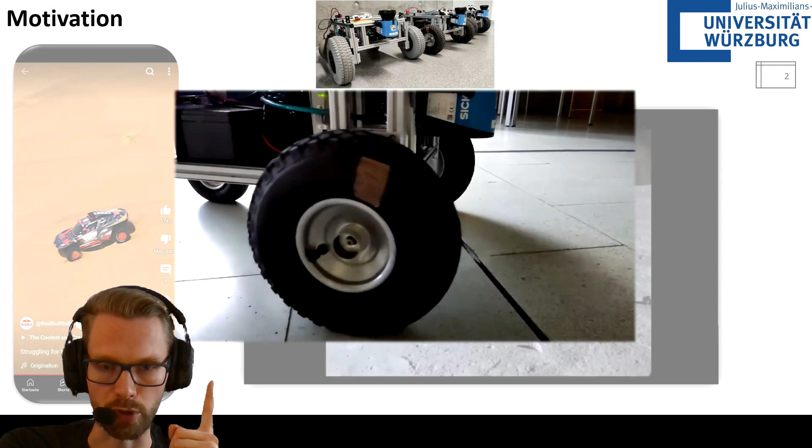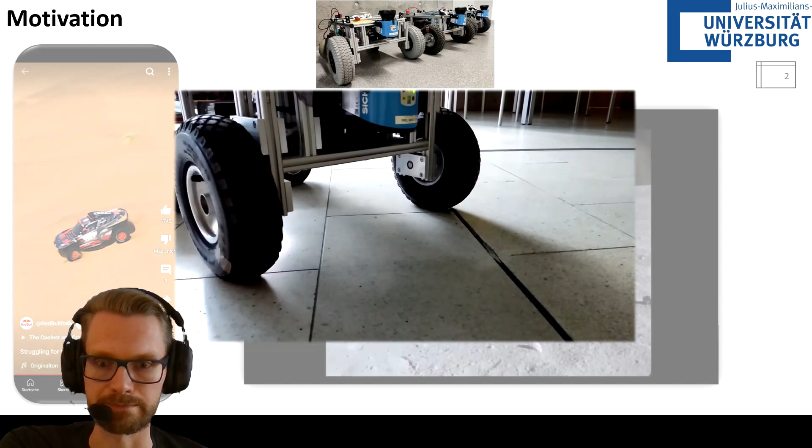Let's have another example. Maybe you do know these kind of robots. These are so-called Volksbots, and we have some of these at the chair for robotics, and they're equipped with laser scanners and fancy stuff. They are not only, but also for teaching purposes. And I did record a brief video on my own. So you can see it's an aggressive movement, on purpose to be honest, just to make it really clear. Here in slow motion, you can see once more that there is not 100% traction.

So these were examples of how it should not look, but how should it look then? I also prepared something like that. Now it's actually a real planetary rover, and you will see it is trying to get up this small but very slippy obstacle. Again, let's have a look.

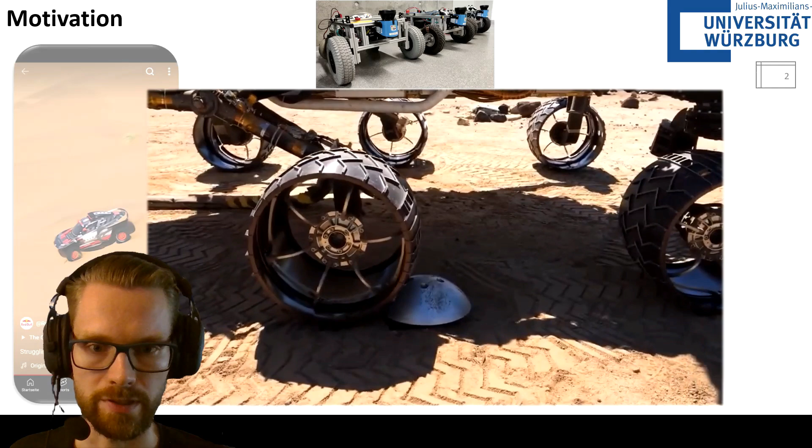This was very quick, regarding the traction control doing its thing. So let's have another look and try to focus on the point when it actually hits the obstacle for the first time. I will comment on it. So watch, slip, and traction. As said, quite quick. So I think this is enough for motivation.

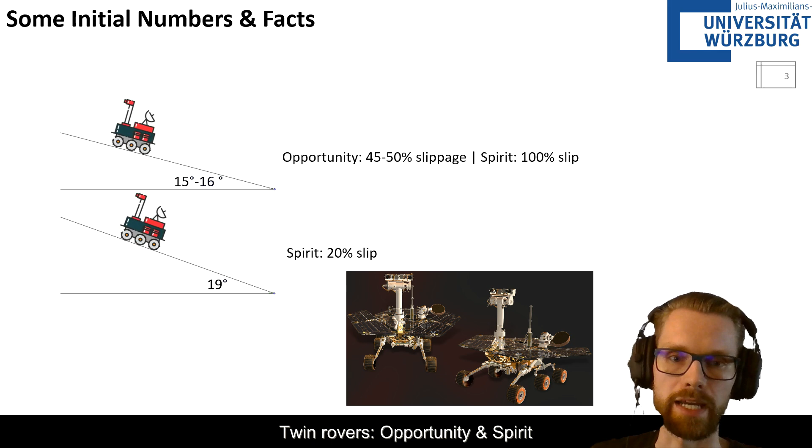Now I also want to give you some initial numbers and facts, not too many, but at least a few. If you think of the rover Opportunity, it experienced a slip of around 50% when it tried to get up a 15-degree slope. And 50% slippage is already quite bad. But on the other hand, Spirit experienced 100% slip, so there was no actual translational movement anymore at all.

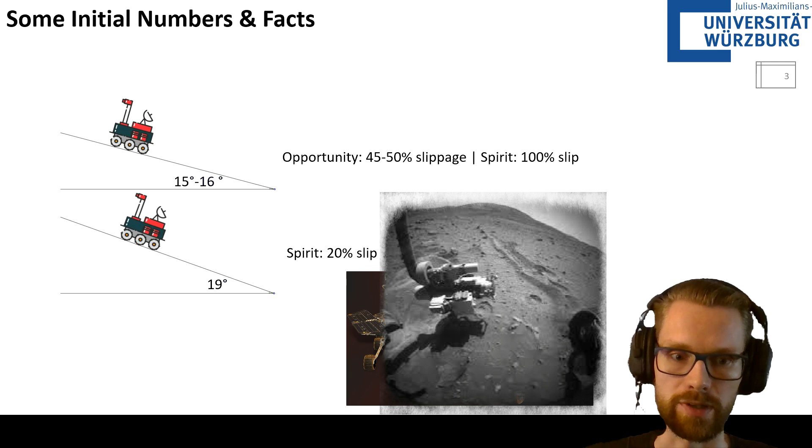And this is the reason why the mission for Spirit was over, because then you can of course not do anything related to your actual mission anymore. No scientific work, actually nothing. So this is the main reason why traction control is so important, because if it fails, you can lose your whole mission, and this is a worst case scenario. But on the other hand, Spirit, before this happened, experienced just 20% slip when it tried to get up a 19-degree slope, so you cannot simply say the steeper, the more slip you have.

And also, just keep in mind, for the sake of completeness, that Spirit and Opportunity were identical. They were, so to say, twin rovers, and so it does not only depend on your rover, on your tires. They did not have tires in that sense, but it does not only depend on the wheels, but also, of course, on the soil and the specific environment and the specific situation your rover is in.

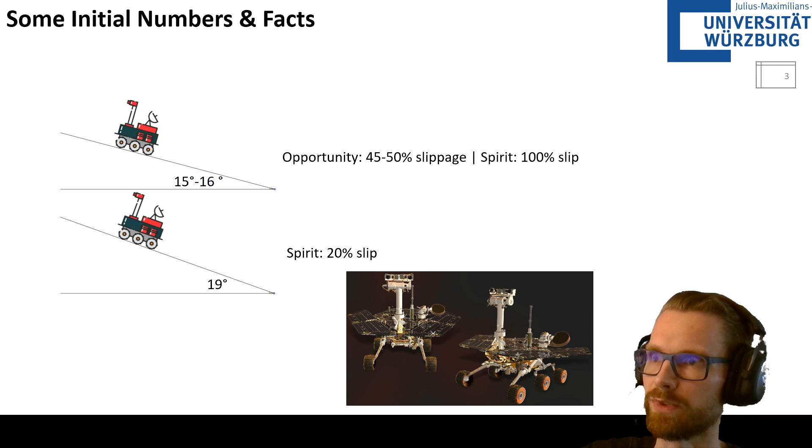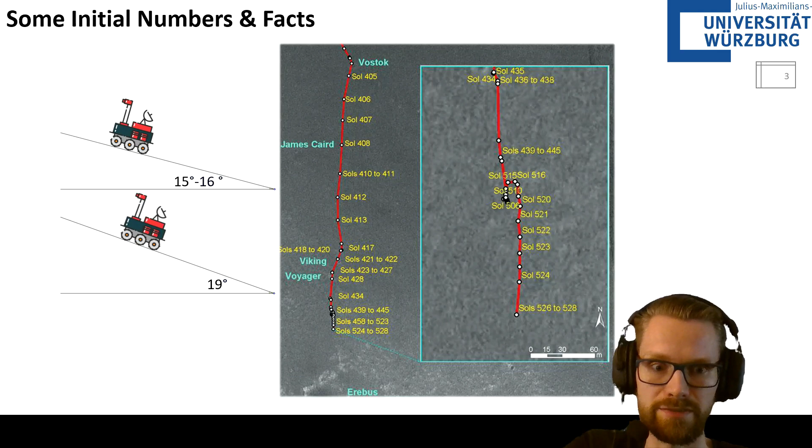And I just wanted to show you yet another picture. Here you can see the trajectory. This part here is just zoomed in from this part, and I wanted to make you aware of this point here, this movement, because this looks so similar to the initial video we just saw with the car in the dunes. And here actually something similar happened: it was driving back for a moment and then had another attempt to get uphill. Yes, and also Opportunity had an issue when it was stuck for 5 weeks, and it took the engineers 5 weeks to get it out of its, let's call it, trap.

I am talking about the overall velocity, which we do not know. Why do we not know it? Because if we have slip, we cannot just take the angular velocity, we have to do something else. And this is the part where it gets tricky. Well, so what can we do about this? I promised you to talk about countermeasures.

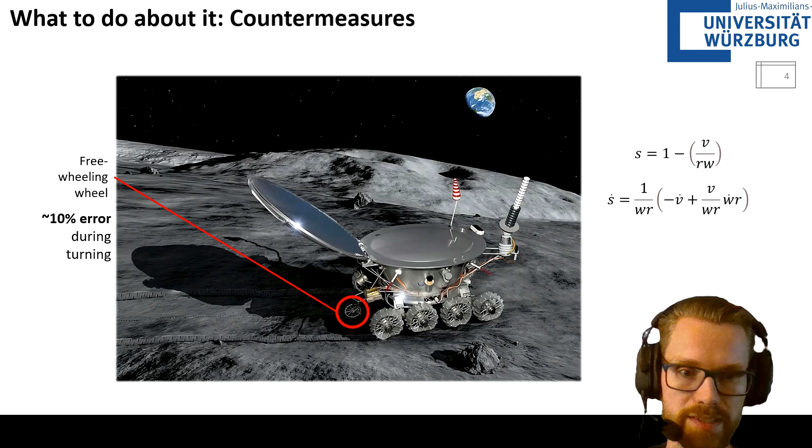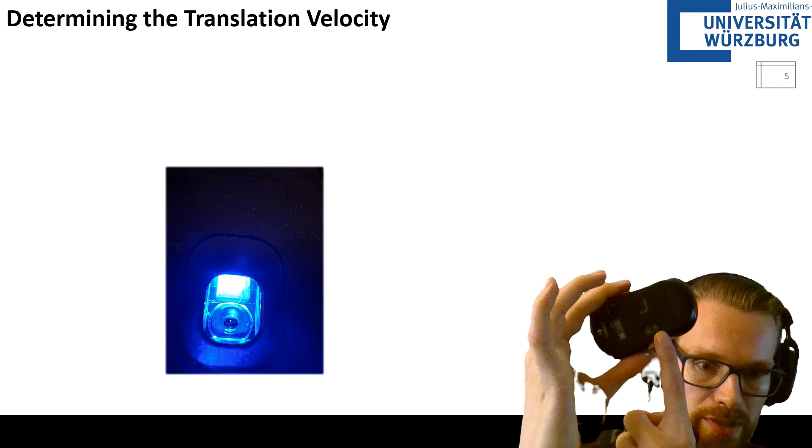So what else can you do about it? Maybe you don't know what you can see in the picture right here. If not, I'll give you a hint, if you can see it on my green screen. It's just from a computer mouse, an optical computer mouse, to be precise. And if you put something similar on your robot, you can track the ground and again do your calculations, and then you have your position, and from that, over time, you can calculate your true velocity.

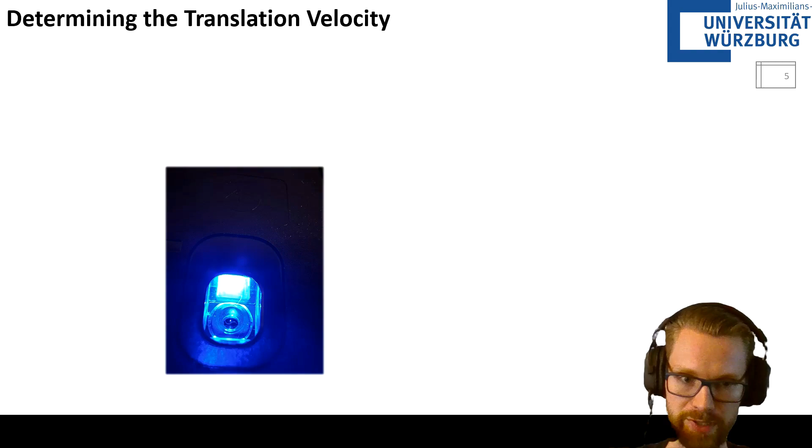This was actually implemented or built into a few robots, but you can easily see these are no practical planetary rovers, more or less prototypes. Actually, it's also for teaching purposes, not as cool as the one from my supervisor I just showed you before, but at least this one here on the right hand side is for teaching purposes.

This one is a bit more enhanced, it's better, more or less, because it has 2 mice, and then you can also reduce the error and so forth. But let's not focus on this. There are also other techniques, like visual odometry. You can use a camera for that, or here in this picture you can see a stereo camera, also again to be precise.

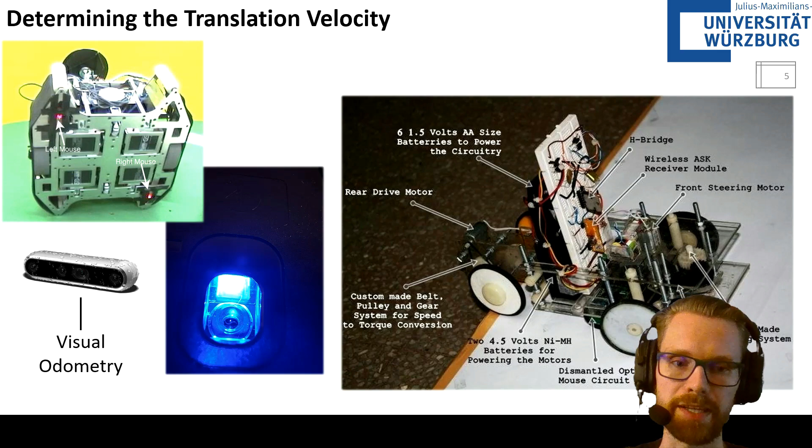But visual odometry for getting your true position is yet another subchapter of the book, which is my main source and which I showed you at the beginning. There are already videos from my fellow students on this channel here on YouTube, so check these out if you want to know more about this, and let's not dig deeper into this. Also, for the sake of completeness, you could use an IMU, an inertial measurement unit,

to improve your data. To be honest, in this book I was just talking about, they said they do not have good results with that because of the drift. But on the other hand, the guys here, Yoshida, doesn't matter how they're pronounced, said they do actually have quite good results with an IMU. So there are different opinions out there, let's put it like that.

But just to mention, for example, Curiosity is also using an IMU, and it has not just one gyro or accelerometer, but 3 each, again for improving your data by having it in a redundant way. But for now, let us just assume that we have the true velocity, so to say. And what is then left to say?

The suspension also plays a role, of course, on the behavior of your system, in particular of your traction. I think you maybe know this suspension type, which is quite famous. And for that one, I found an algorithm which I love for its simplicity, and I will go through it step by step with you. Let's just begin.

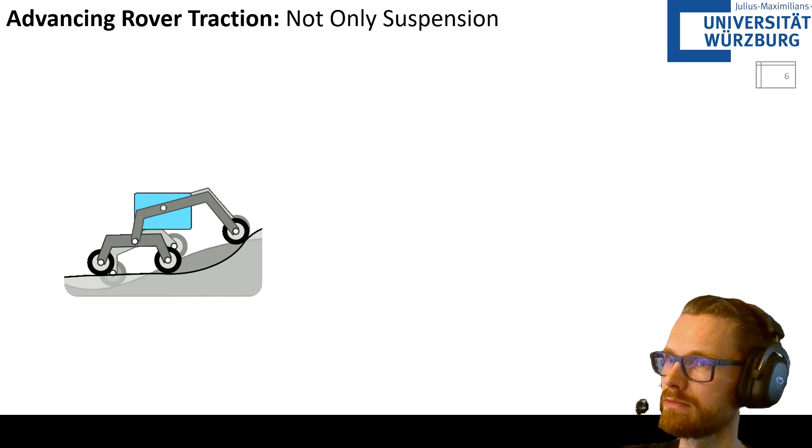So you have your initial speed, you're going straight with this robot, and you keep the velocity. Then, as an obstacle approaches the front wheels, you increase the speed of the middle wheel by 30% and decrease the speed of the rear wheel by also 30%. Then, when the obstacle is directly under the front wheel, return to your initial speed you had before.

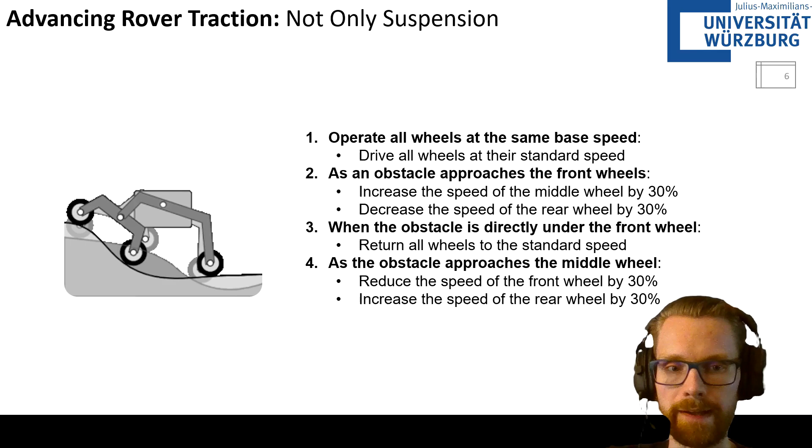After that, when the obstacle is next to the middle wheel, again do some reduction, and here increase the speed of the rear wheel by 30%, as you can read it here. And after that, go to normal speed again. So if it is going to the right hand side, as it was just before in the GIF, if it reaches this point, you do this here. If it reaches this point, you do this here.

And if it reaches the last pair of wheels, there's nothing special to consider anymore. This is why it's not mentioned in the short description of this algorithm. This seemed to be quite practical, and as said, I loved it for its simplicity. But what do you need for this? You need some kind of sensors, like these load sensors. You can see it here separately, and here you can see it built in.

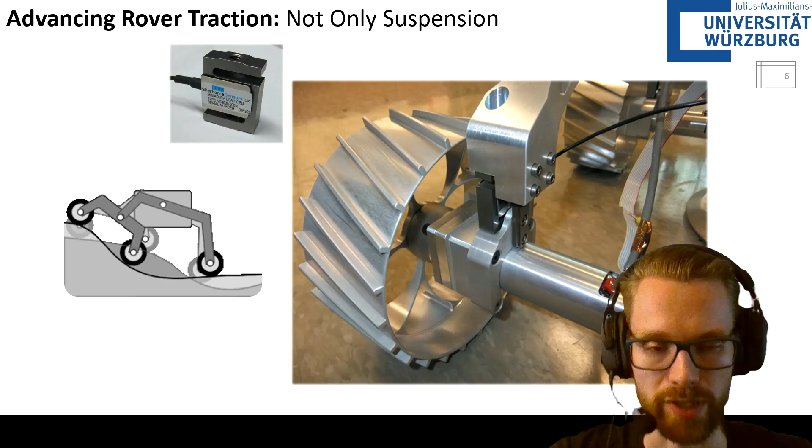Why do you need this? Well, how should you know when you reach your obstacle otherwise? And if you get this information from your load sensor, then you have to do your calculations or your control commands for the velocity really, really quick. But then this should work. Alright, let's continue before my video gets too long.

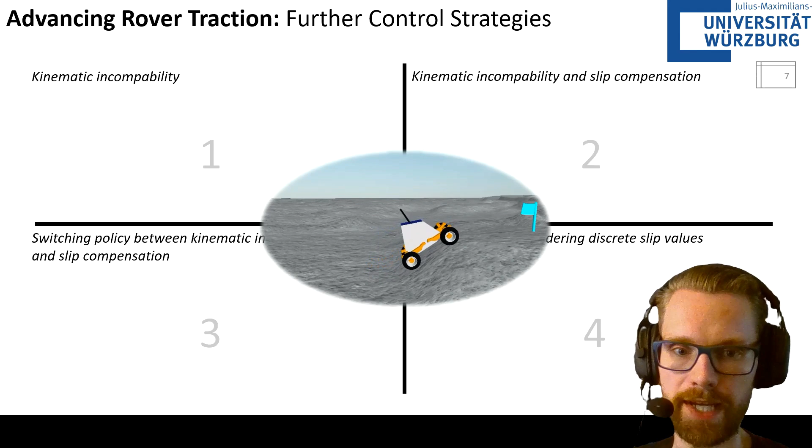I also want to show you some other approaches for control strategies. Let's first have a look at a simulation which has no traction control at all. So this is how it goes, trying to get up the hill. The goal is to reach the flag on the right hand side, and as you can see, it does not make it. Not really surprising if you have in mind that it has no traction control.

What can you do about this? You can use this approach called kinematic incompatibility. What is this? It's about wheel fighting. If you have a poor control which is not considering that you have several wheels, this can lead to wheel fighting, so that they do not interact in a way which is good for your overall traction. And the first approach is considering this.

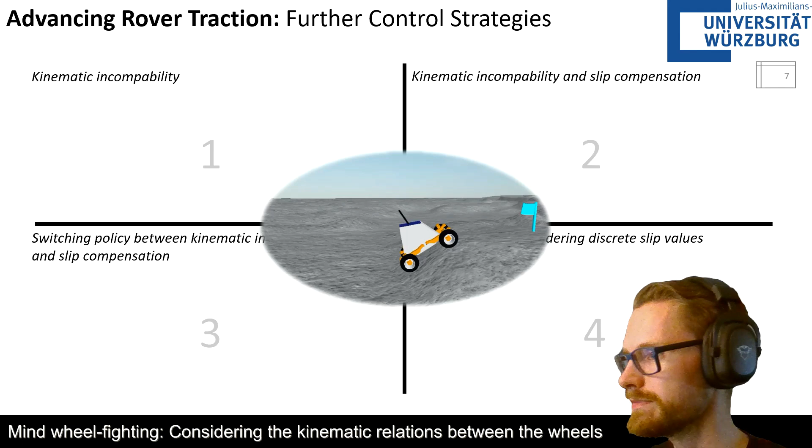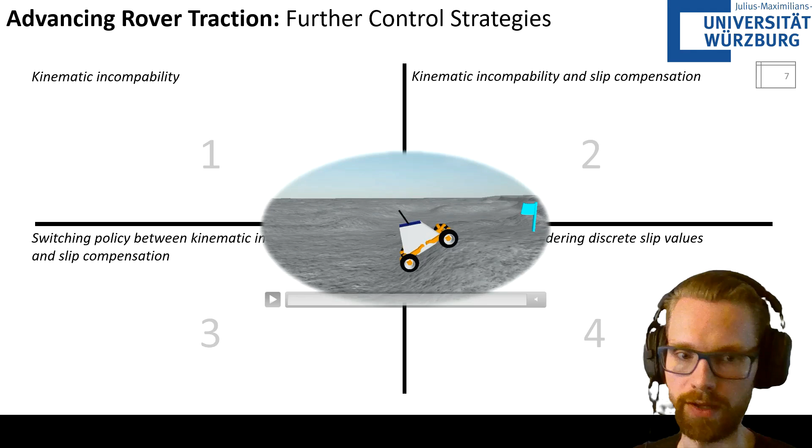How is it doing this? Let's go a step back. It's using the angle. So if you have your suspension here, and if it goes uphill, then you have a specific angle here at this part of the suspension. And this is considered for avoiding this wheel fighting. What does it look like then? So here's yet another video.

Again, trying to get to this flag. And getting interesting. It made it. Very nice. Okay. Next, you can not only do what we just saw in this case here, you can also estimate your slip. And it is done in this case by saying, hey, the slip has a constant coefficient. So it's fixed, it's constant.

And before I explain any further, maybe just let's have a look. And this is what happens. It does not make it. It looks even worse than what we have seen without any traction control. And this is again not surprising because, as I said, the slip is considered as a constant coefficient, and this is maybe just too far from reality, and this is why it does not work. But it is important still for the next examples, as you will see.

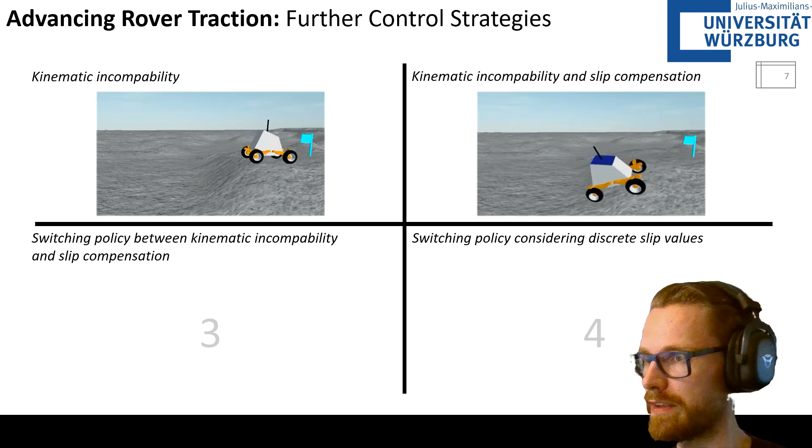So the third one has a switching policy between the former two, so between this here and this here. It has a threshold, so if the contact angle of the wheel is below, then use the first policy, and otherwise use the other policy. Let's again have a look.

And it made it. So maybe it looks very similar to that one, and it's hard to see on the video, I know, but in the paper where I've got this from, the guy who made this is called Gonzalez, there is a movement in the direction out of the plane, so to say. So it's walking from the left to right, and this is coming, can I show it like this? In this direction, more than here before, so this is also worse than that one.

So for the fourth, I go over here, and again, we have the question what to do about the previous disadvantages. For the next approach, we reuse the idea of the third control, which was here, but not only say if and else, but do the estimation for low slip, for medium slip, for much slip, etc. And then what we get looks like given here, in the bottom right corner. So far it looks good. And yes, it made it, and indeed, this was now the best version of all of the four.

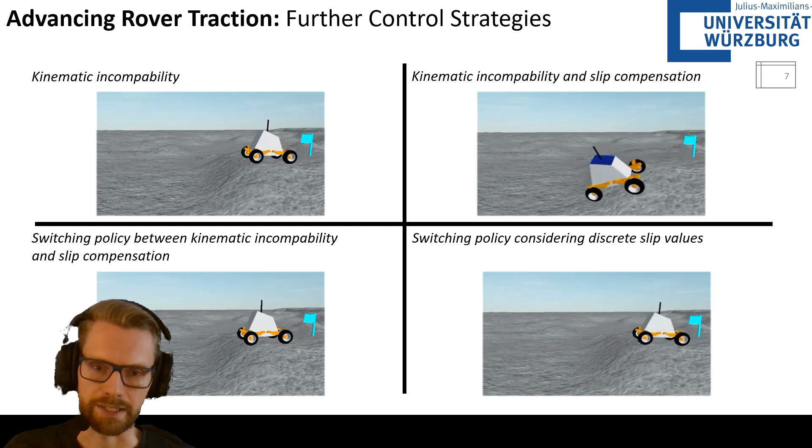Alright, I think this was good enough for an overview. However, it's important to mention that all these approaches are velocity-based, and you can also do this in a torque-based manner, which may be more difficult, but it is advanced in comparison, definitely. And it's also actually used by more expensive rovers. Anyway, I guess you have an idea now how to improve traction control step by step, and this brings us close to the end of my presentation, for which I have a last few words.

Everything we discussed was for the case that your traction control works properly. I mean, that's what we are doing all the effort for. But what if it fails? What if it fails no matter what you have tried, how hard you tried, what you considered, and what you have done? To answer what you do then, I have a final last video for you.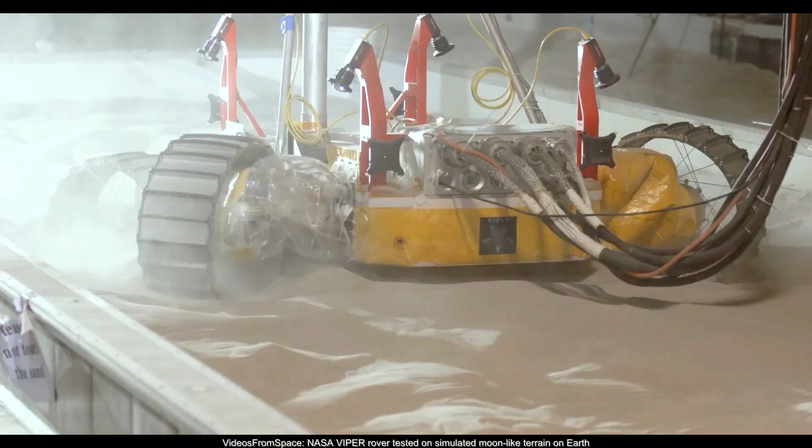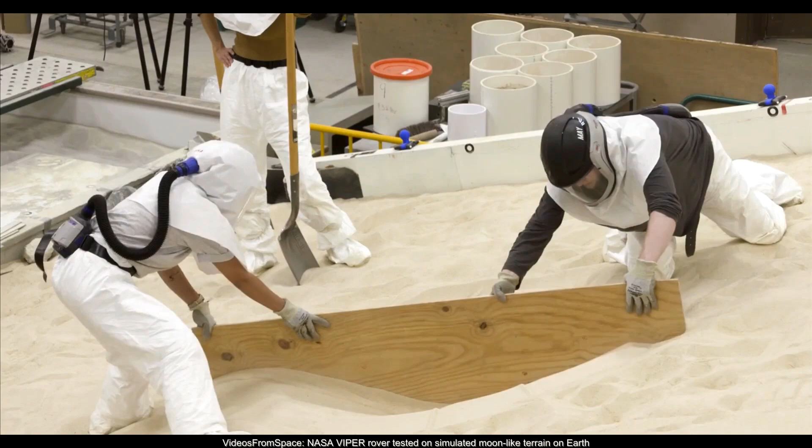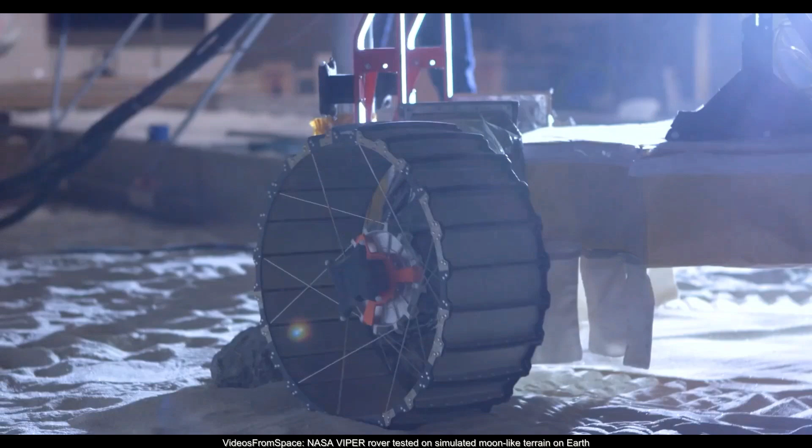We want to check that the system does what it is supposed to do once on the moon. The VIPER test unit that is behind me is a light version of the full VIPER rover. We strip down the heavy components to try to maintain the mass load so that we can drive on Earth, which has a much higher gravity. And we need to do this because the system is designed to go to the moon, where it will be a lot lighter. We have consulted NASA scientists who have analyzed images and data from previous Apollo missions to determine the distribution of rocks and craters of different sizes over certain areas of the terrain and the shapes and characteristics of rocks that we expect to see on the surface. So what we've done is use that information to recreate a moon-like terrain for the rover.

We're testing our rover capabilities when we go into an extreme sinkage environment. So on the moon, when we're roving, we might encounter areas with fluffier soil, something similar to quicksand. And so our rover has a capability to still make forward progress in these quicksands. We're also testing the ability that the rover has to move in a very special way, similar to a caterpillar inchworming motion. So the rover is able to change the distance between its wheels and apply power to the wheels in a very coordinated manner, and that would allow the VIPER rover to get unstuck of this quicksand. This is challenging for the rover, but it's important to test because we need to better understand and mitigate risks and hazards to the rover. And we have a great team of NASA engineers here to address any risks that we might face.